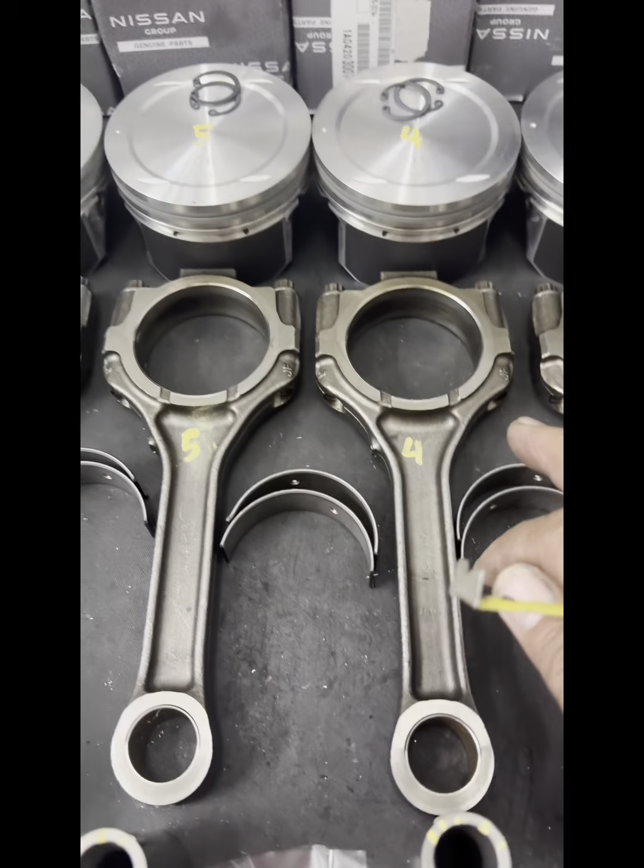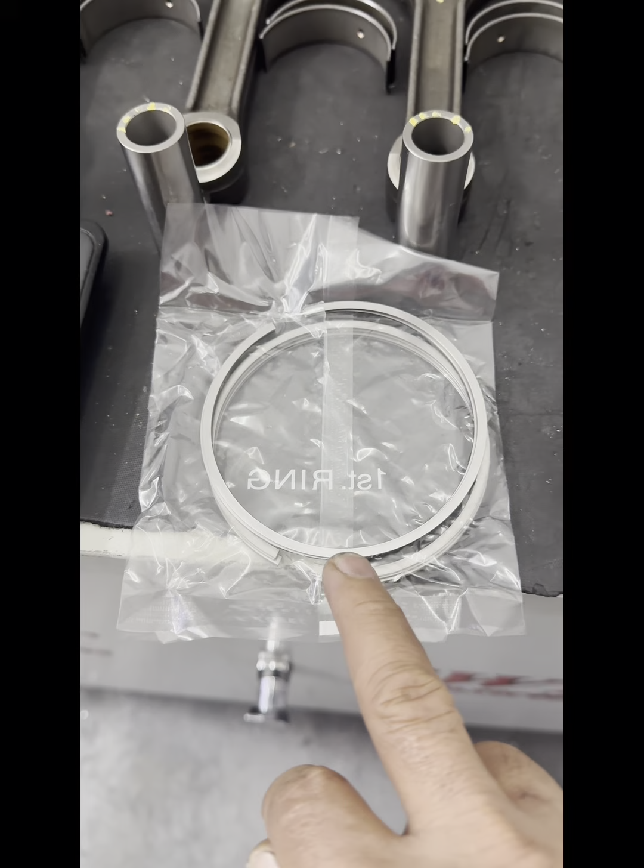And all the parts as usual. To balance a V-type engine, V6, V8, or even a 5-cylinder as well, we need to use bob weight. So to use bob weight, we have to calculate everything, the weights from the piston, the clips, everything. The rods, big end and small end, piston pin, and the bearing as well. And with the piston rings, we need only one set: the first ring, the second ring, and the oil ring.

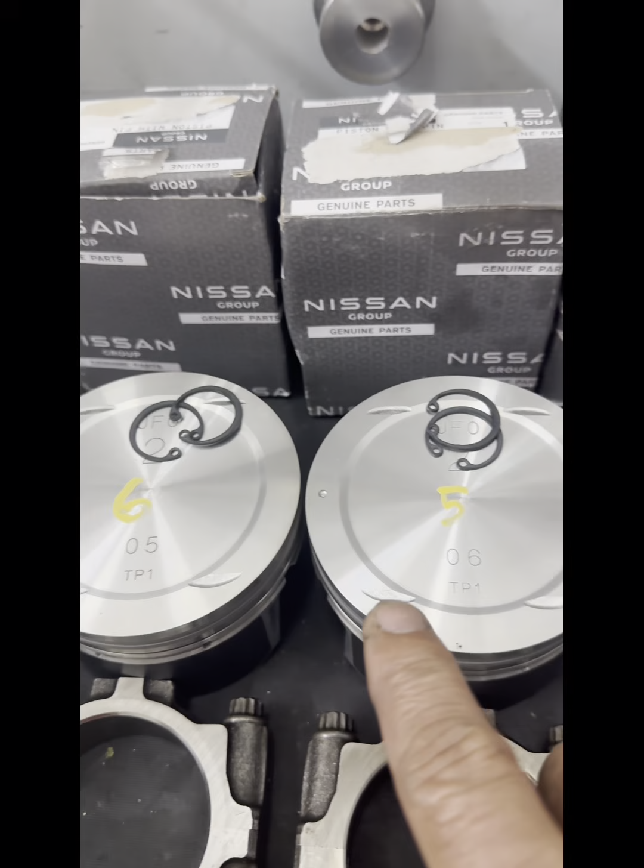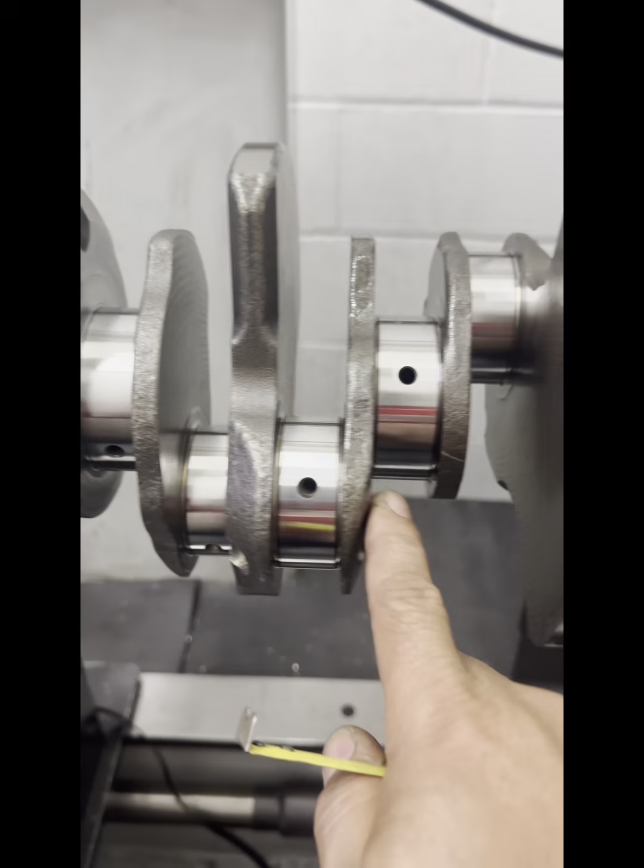So actually this crank is already ground 0.25, using ACL race bearings, 0.25 main and conrod. But for balancing, we need only the conrod bearing. Main bearing, we don't need. The piston is Nissan genuine, all original, along with the connecting rod, original, and the piston ring. So the crank is already ground, main and conrod 0.25, all nice already.

Alright, so now we're going to input all the data there. Okay, this one, B to B is the base. Here. 350. So 350, enter. And the radius. Radius is from the main up to the balancer, outermost from the center of the main. Okay, this radius is 93, left and right the same, 93.

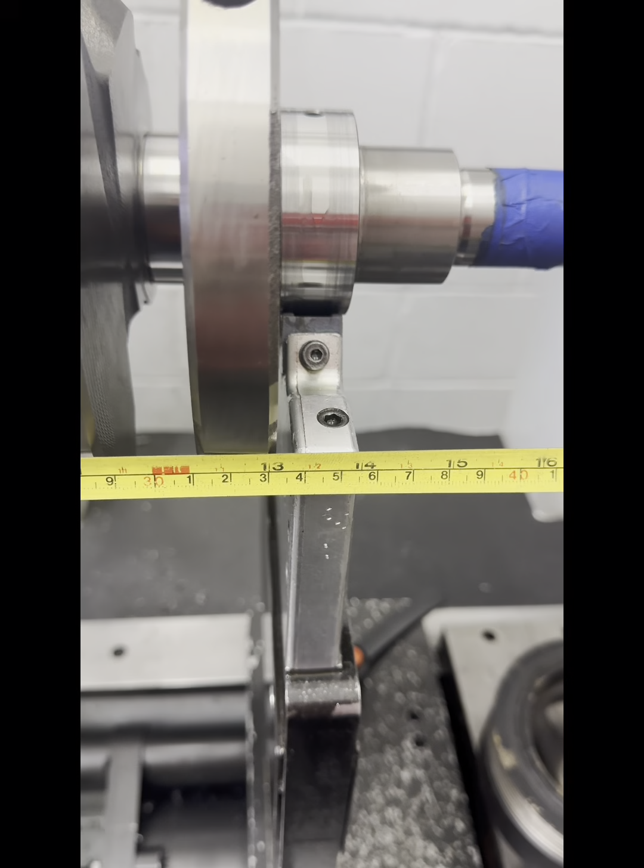Alright, the plane is this thing. The left plane is measured from the base to the center of the first balancer, 25. So 25, enter. And the right plane is from the base to the last balancer. Here. 325. So right plane, 325.

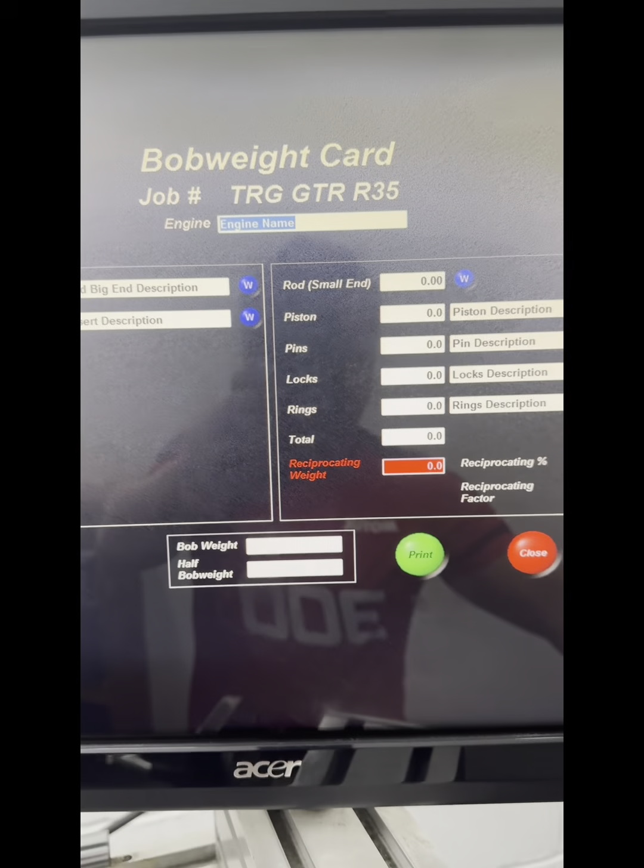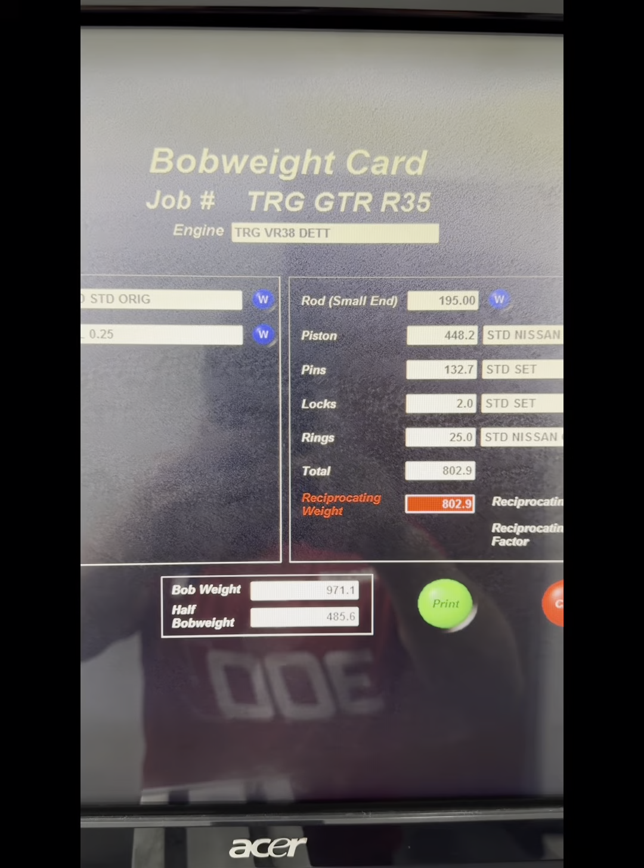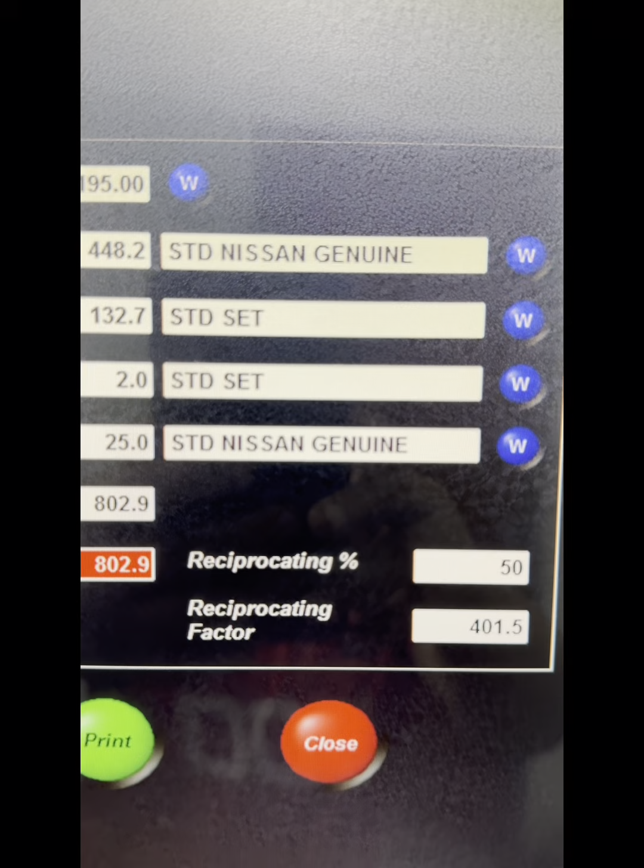Alright, now we're going to calculate the bob weight. All the data for the bob weight we will input here. This is the bob weight card for the calculation. So this is the description for the connecting rod, standard original. For the insert, the bearings are ACL 0.25, and the piston, pins and locks as well. The piston is standard Nissan genuine, the pin standard set, and the piston ring standard Nissan genuine.

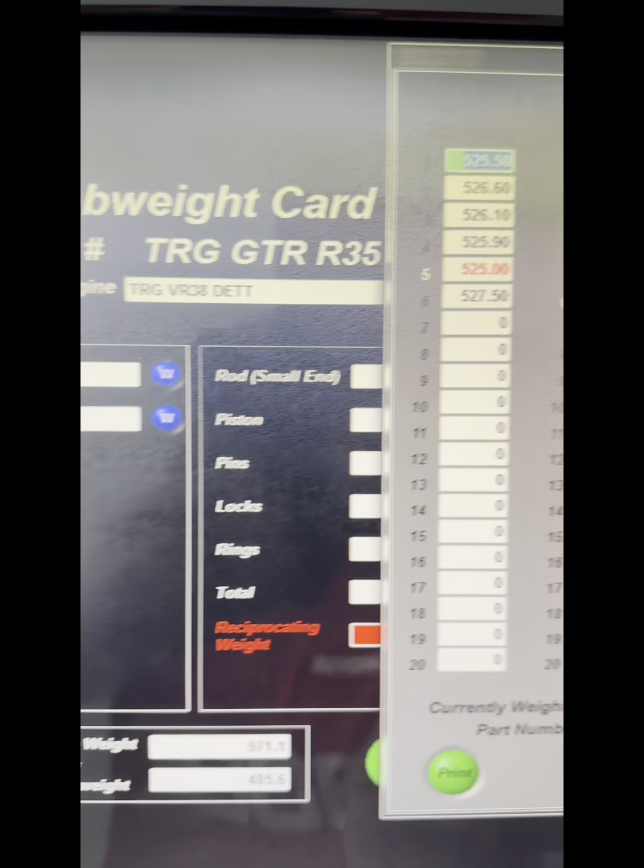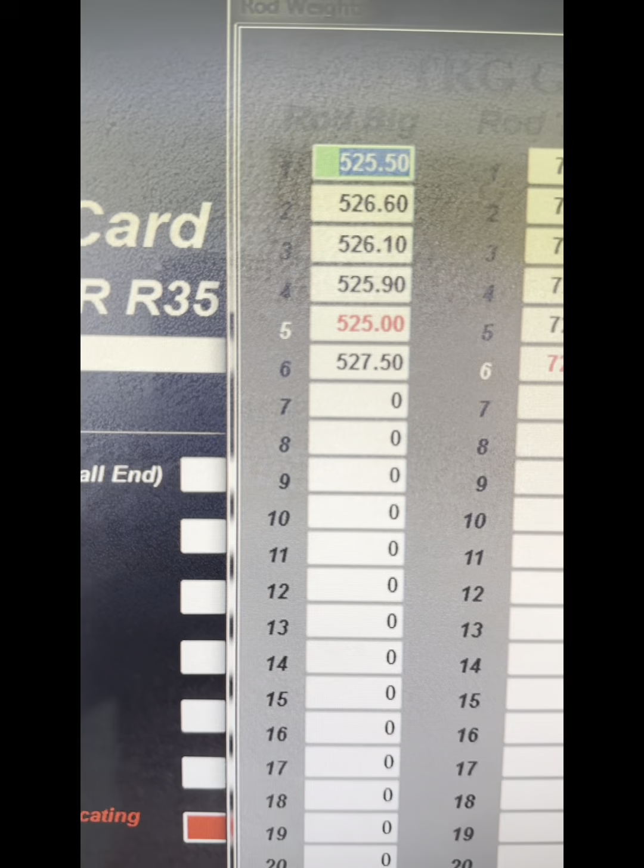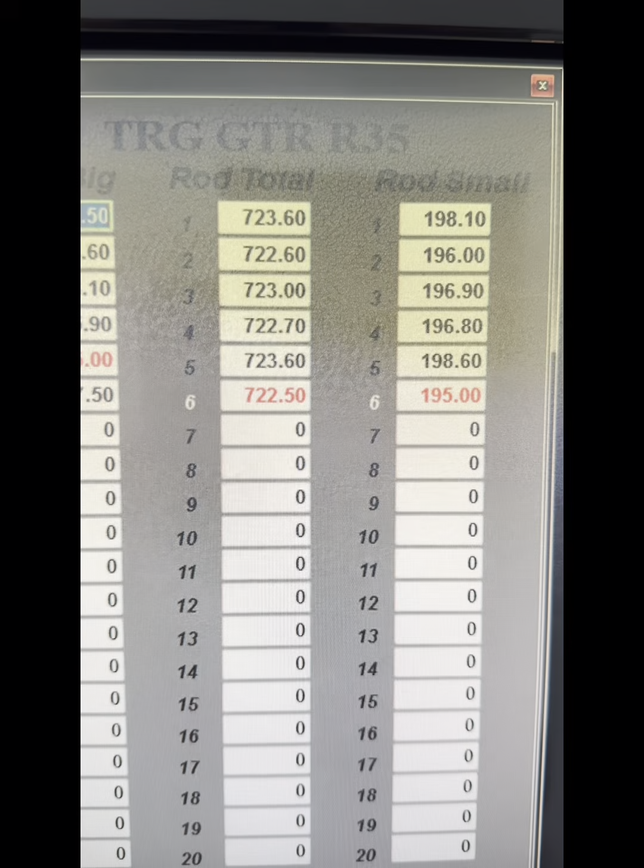So here I already input the connecting rod. This side is the rod big end, this one the total rod weight, and this one the rod small end bore weight. The important thing is the small end and the rod total, this is the reciprocating weight. The rod big end is the rotating weight. Here the heavier big end is number 6, but the total weight is lighter. So we have to focus on the small end weights. We follow the lighter one, the lighter total rod.

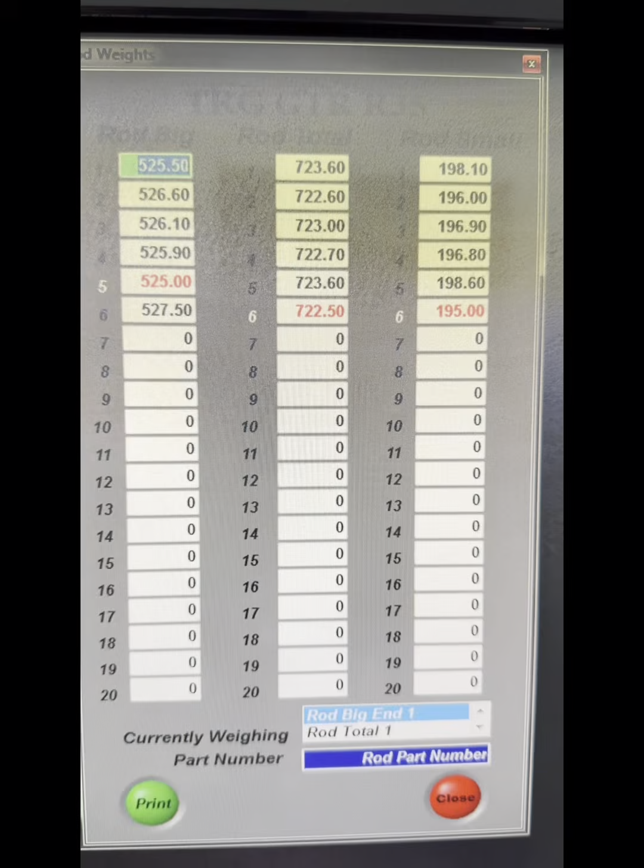Alright, now we do the removing of weight, balancing the connecting rods. Okay, we're ready to balance the rods. Most of the weight we take from the small end. This one also from the big end, but not from the small end, because we have to focus on the total weight of the rod. So here's the number we get.

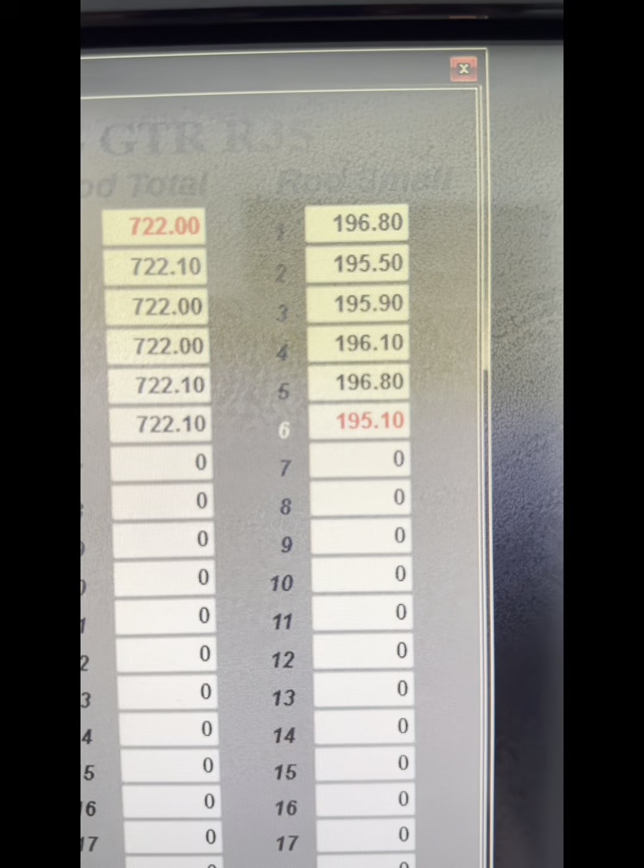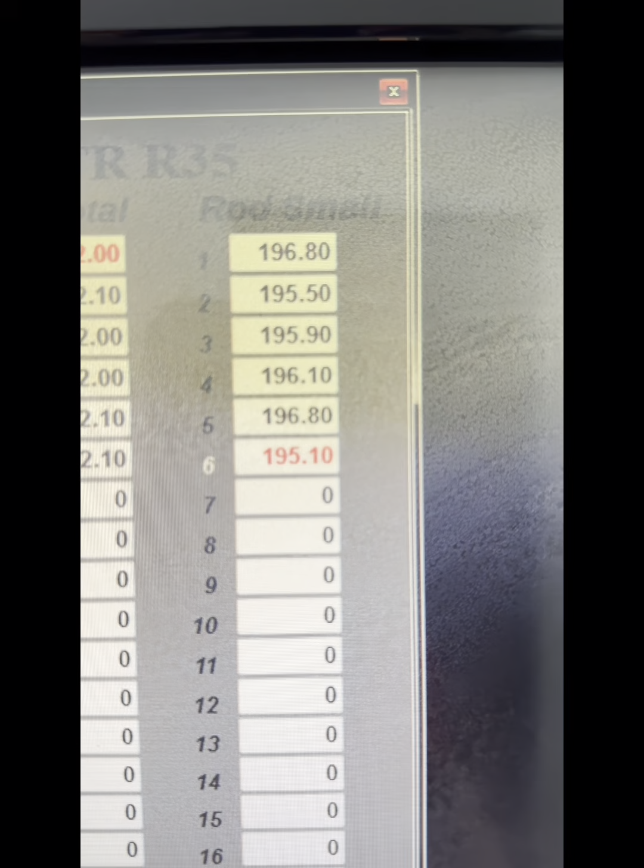So the rod total is within around 0.1 grams only. The small end is the closest we can get. It depends on the rod big end. The rod total minus the rod big end equals the rod small end. This is very important, these two, the rod total and the rod small end bore. Alright, done with the rods.

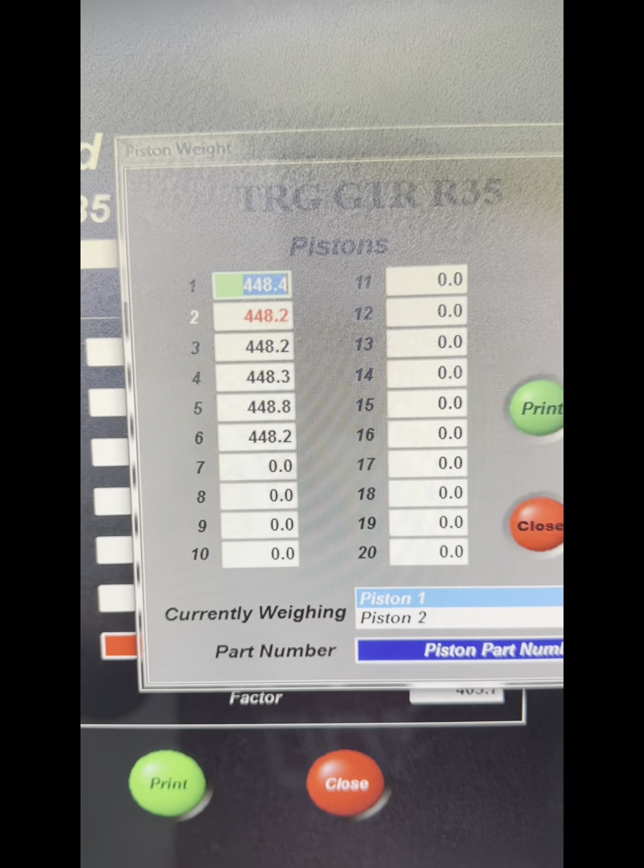Okay, for the pistons, number 1 is 448.4. Number 2 is the lightest one, 448.2, around 0.2 grams less. The heaviest one is number 5, 448.8. So we have to remove weight. We follow number 2.

So this one, the lightest one, so we follow this weight, number 2. Alright. The piston, I really removed some weight there, just a bit only. Follow the timbang 448.2. This one is 448.2.

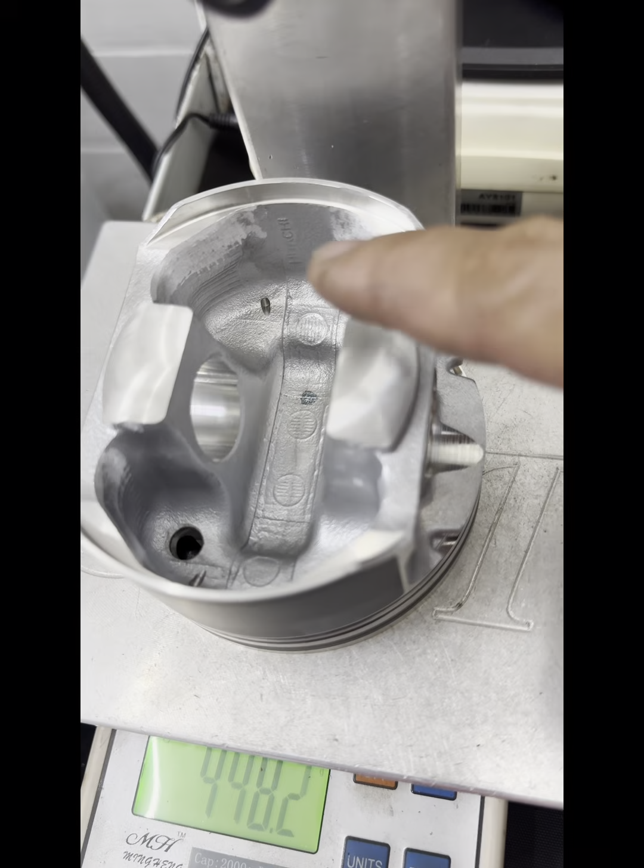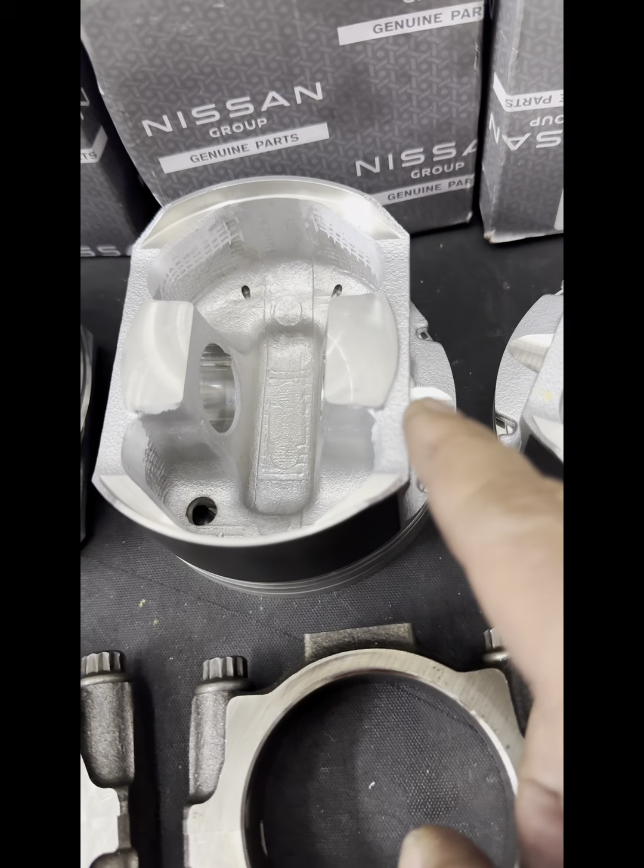But in removing weights of piston, you have to be very careful. It cannot be simply anywhere. This area we can remove weights, like here, this area. We cannot simply take, we have to see the strong point. Alright, these three only we remove weight because the rest are almost the same already.

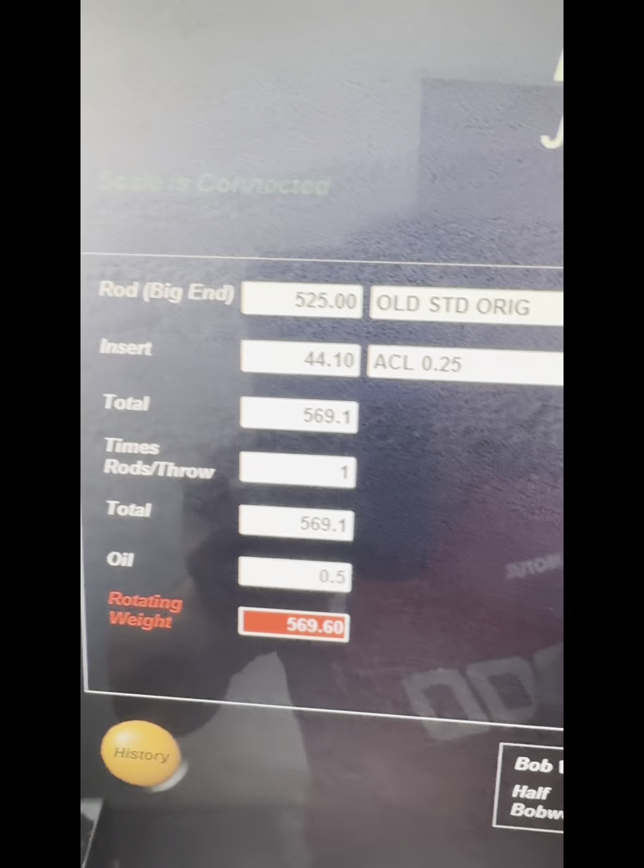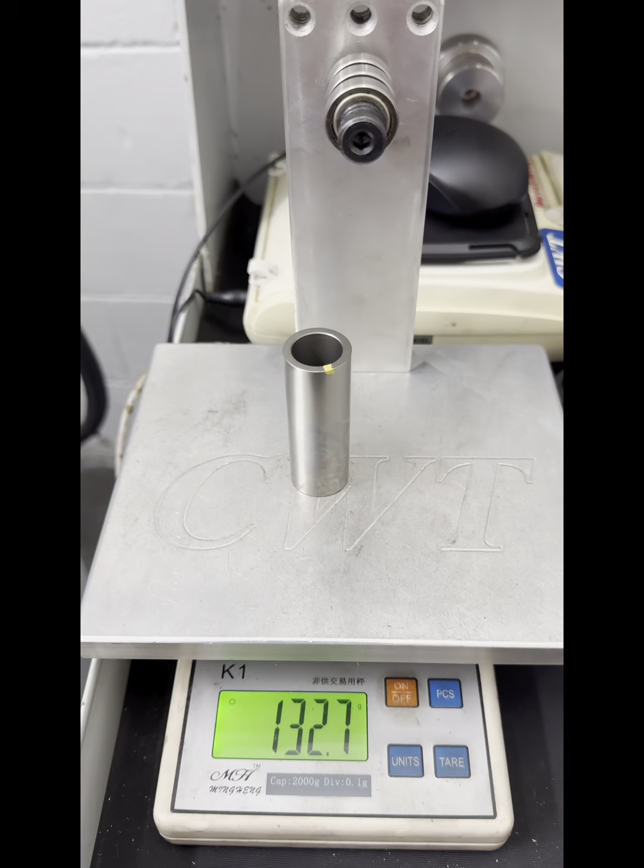Same weight already. The lock as well, 2 grams. Here the lock is 2 grams input. We'll weigh this insert or the bearings. So this one is 44.1, here 44.1. Insert in the piston ring. This one is 25.0. Here is 25.0, piston ring inputted already. Alright. Piston pin 132.7. Here, piston pins 132.7. Okay, we have all the data.

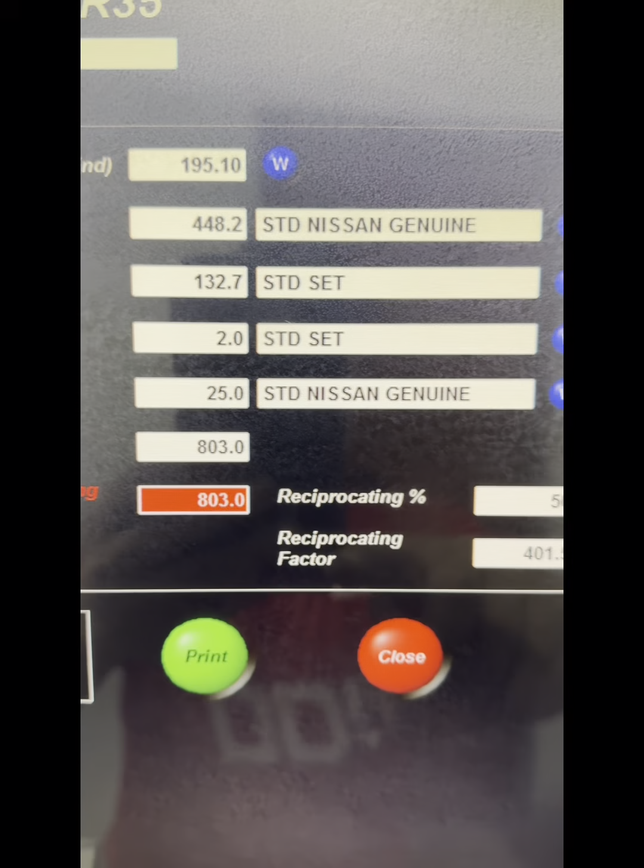So this is the reciprocating weight. This one the rotating weights. So the reciprocating weight is 50% to be calculated. So the total reciprocating weight is 803. So 50% is 401. 401 plus the rotating weight 569. So our bob weight is 971.2. So this is our bob weight, the weight of our bob weights.

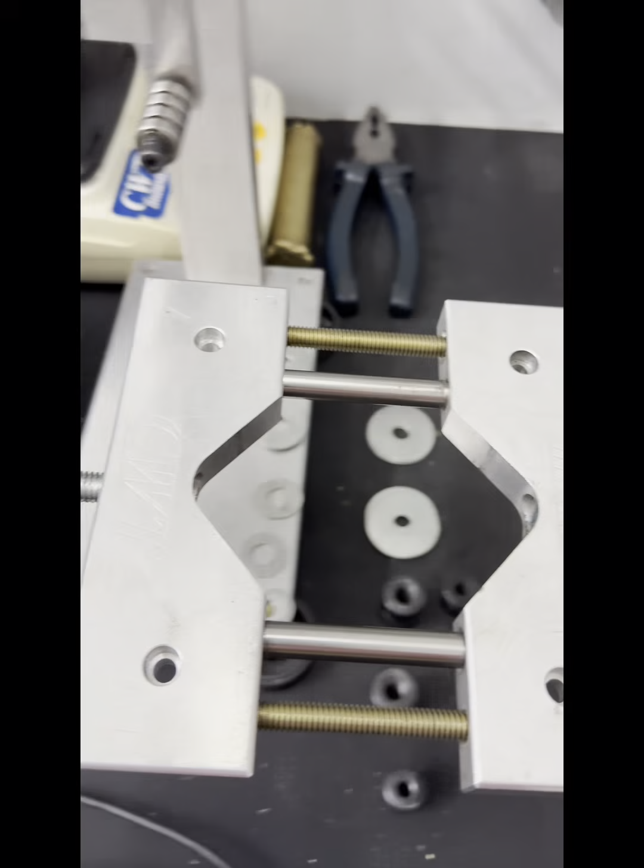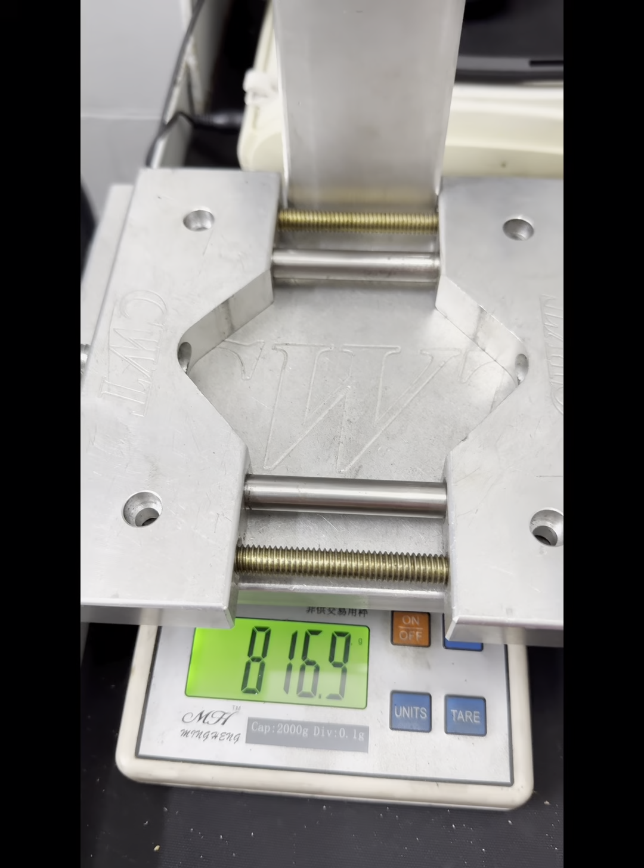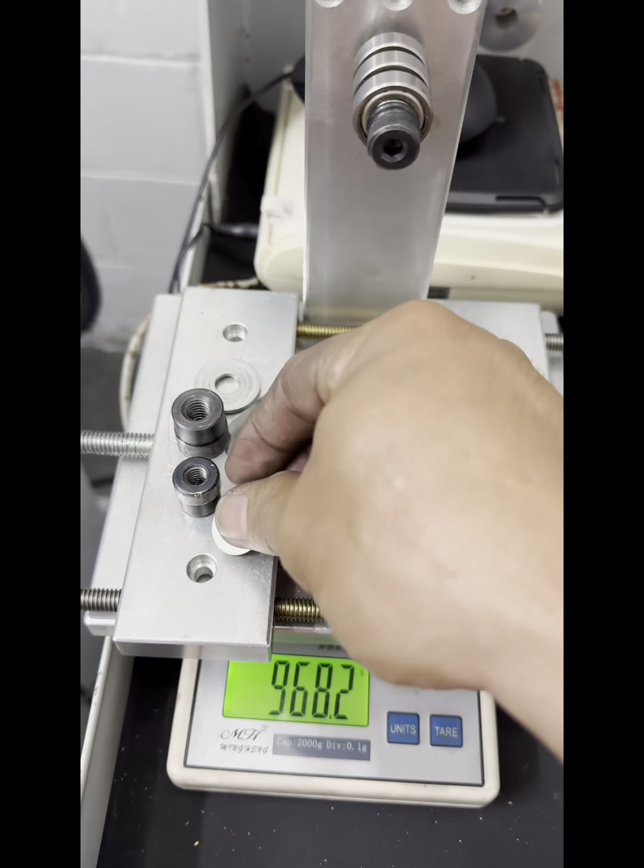So we pause. Alright, so we have to put everything all the same, left and right. So 971.2. So however many you put this side, same also this side. So we balance. So 971. This one 971.3. So 971.2, around 0.1. 0.1 cannot affect a lot, just 0.1 grams. Alright, so this is our bob weight, total weight of this one.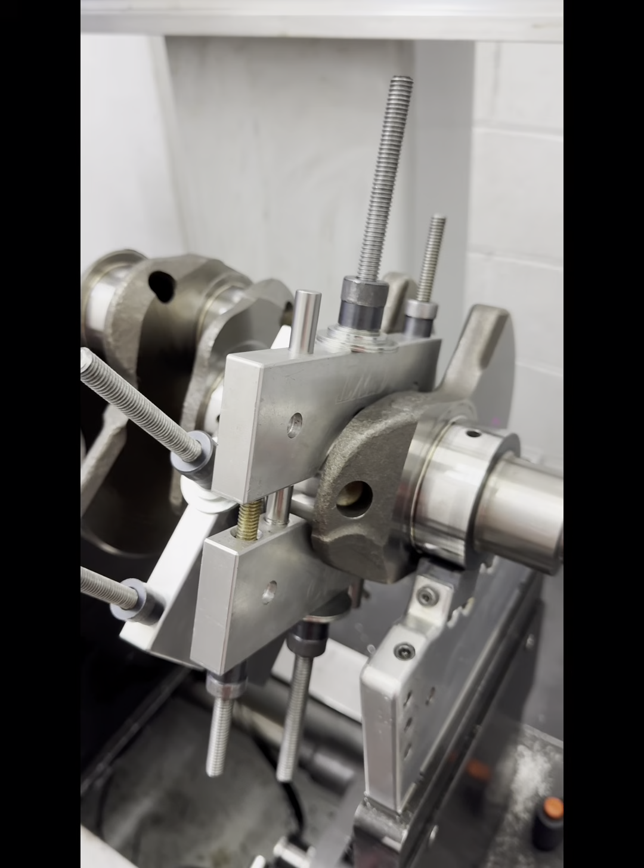So now we're going to install this one to the crankshaft. Alright, so now installing the bob weight. I installed already, another 4 more. Right, done installing all the bob weights. So 6 bob weights. So now we're going to balance this crankshaft first. This GTR R35 VR38 engine can be balanced with the crankshaft first, and then after that, we put the pulley and the flywheel.

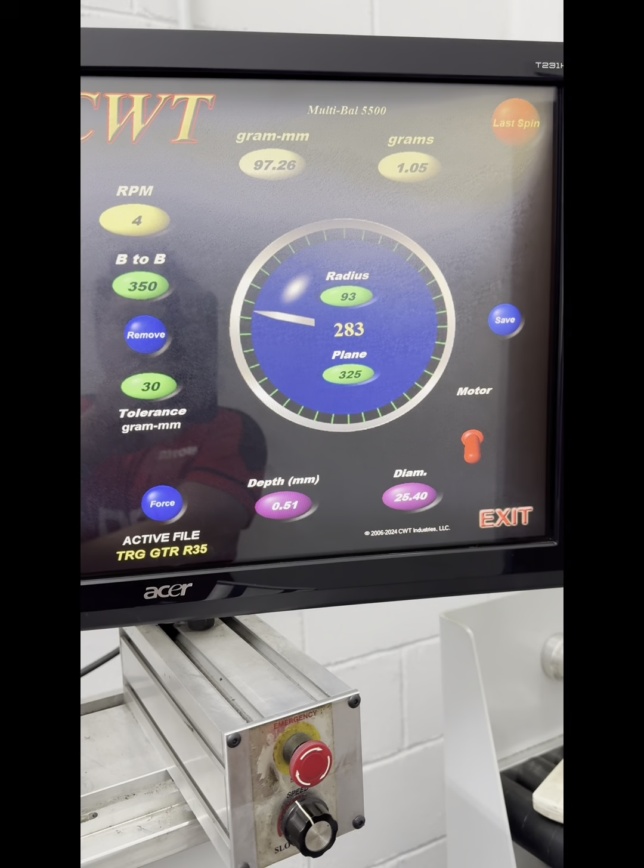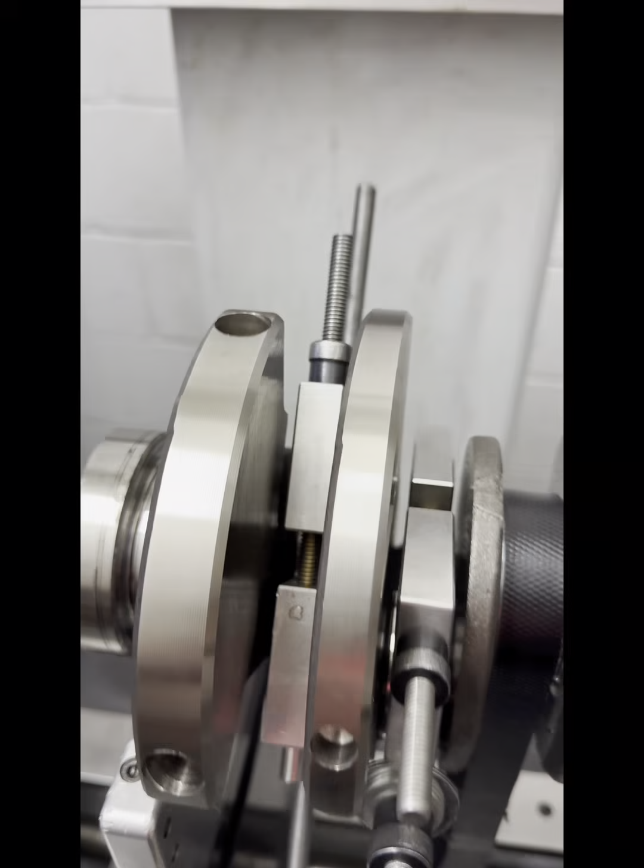Okay, so now we're going to spin the crankshaft first at 400 RPM. With the spin, we will know how big and where the unbalance is for this crank. This crank we ground because it bent a bit; we ground 0.25 main and front rod. Alright, the unbalance: left side or the flywheel side 2.73 grams, front side or the pulley side 1 gram. So here for the front side, this side. For the rear side or left side, this side.

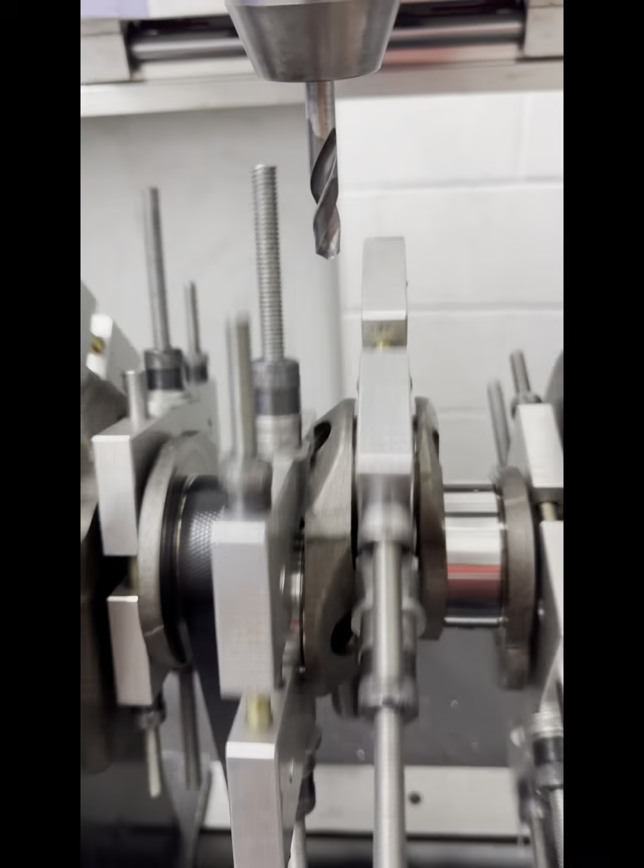Alright, now we do correction, remove some weights, we balance, and then we spin again. Okay, now we remove weights at this angle, around 2.73 grams. Since we cannot drill here, we drill here. 2.73 grams. Alright, we drilled this. So now we're going to spin and see how much is still to remove. Alright, spin.

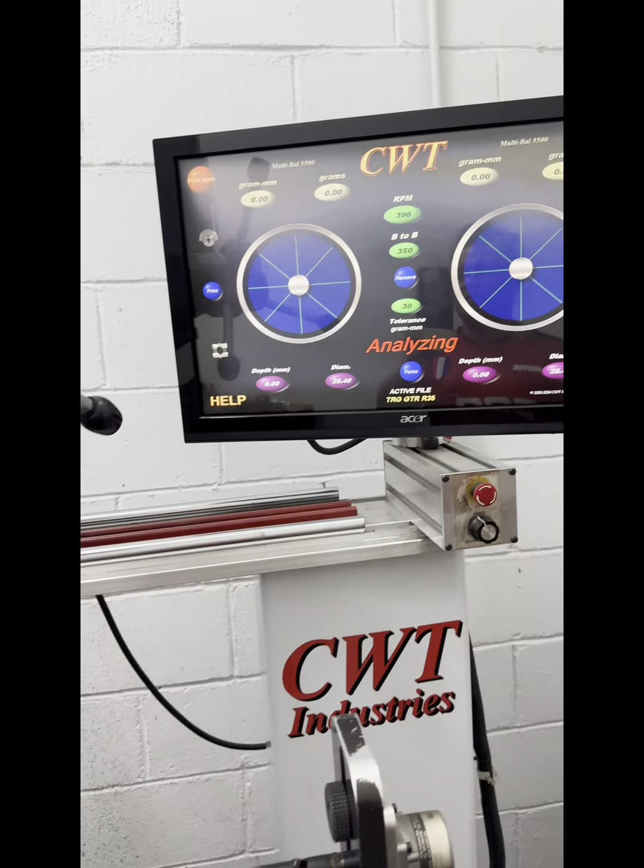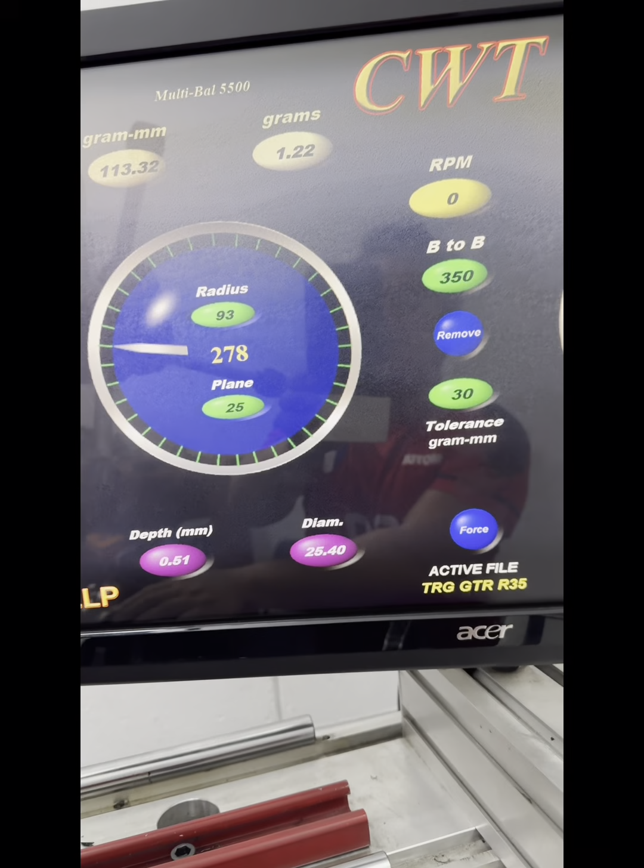Now spinning. Analyzing. Alright, here it is. From 2.73 grams now 1.22 grams. The front side we don't touch yet, so we do the left side first, the rear side. So 1.22 grams left, this side, same. Still not enough, so we need to drill some more on this side. Right, so I drill another one here. Hopefully this one is enough or not, so we have to check.

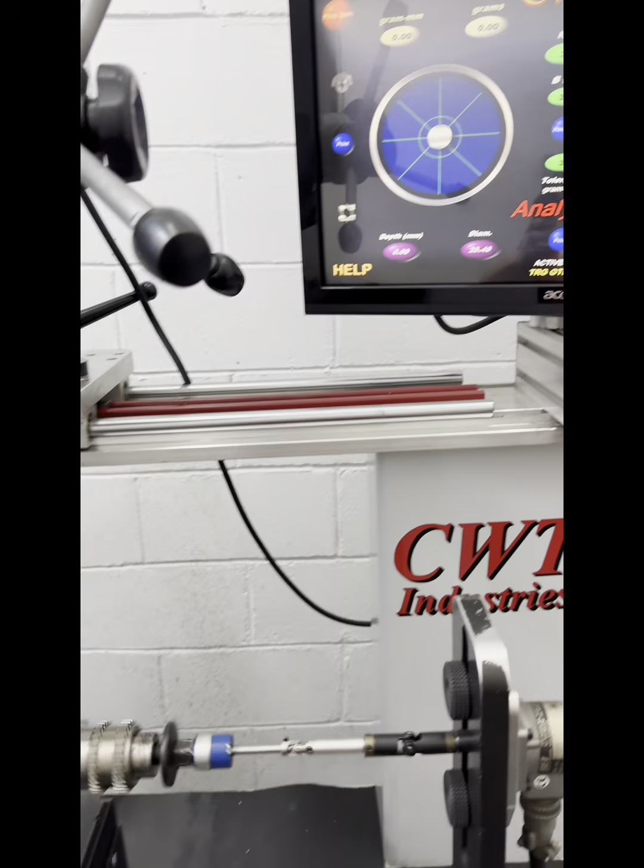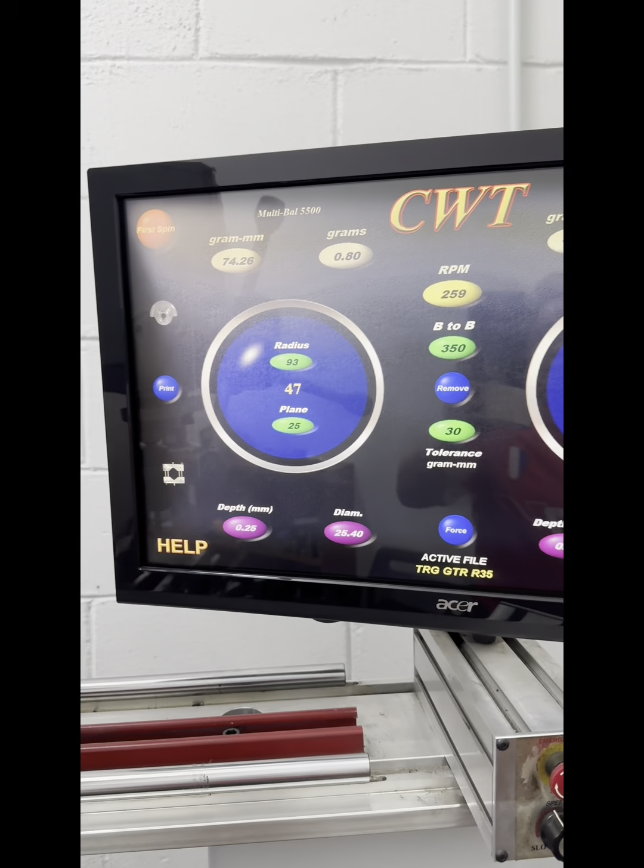Spin again. Alright, spinning. So hopefully the one we drilled is enough, around 1.22 grams for the left side. The front side we don't touch yet, a bit unbalanced there. Alright. From 1.2 grams, now 0.8 grams. But the front side went from 1 gram to 1.8 grams. It's normal that when we drill, the other side will be affected.

So which side? The front side? This one. This side, so we can remove weights here. The left side, which side? Same area here, somewhere. So still okay, but we have to do correction first on the front side. Here, we have to remove some weight on this front side. Okay, now we're going to remove 1.8 grams on the front side, right side. Alright, yeah.

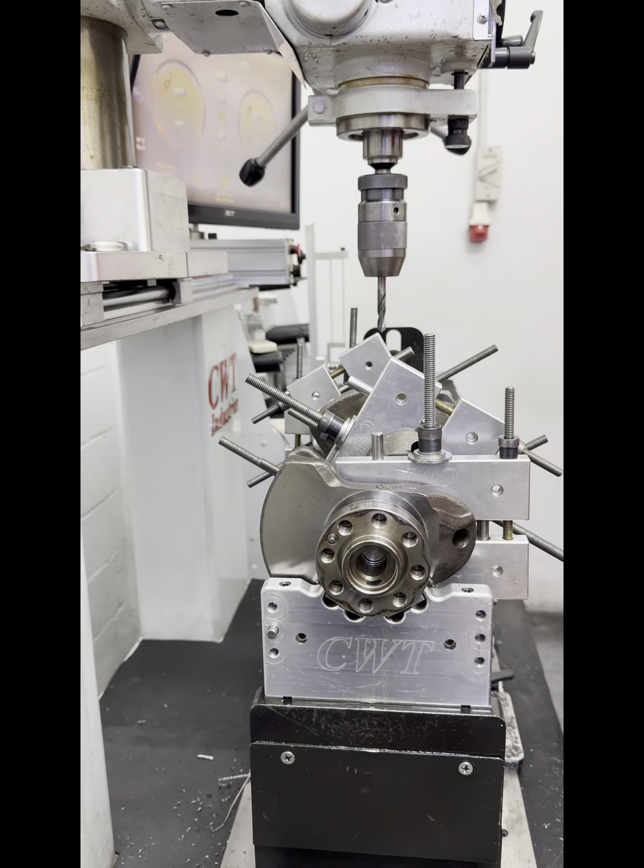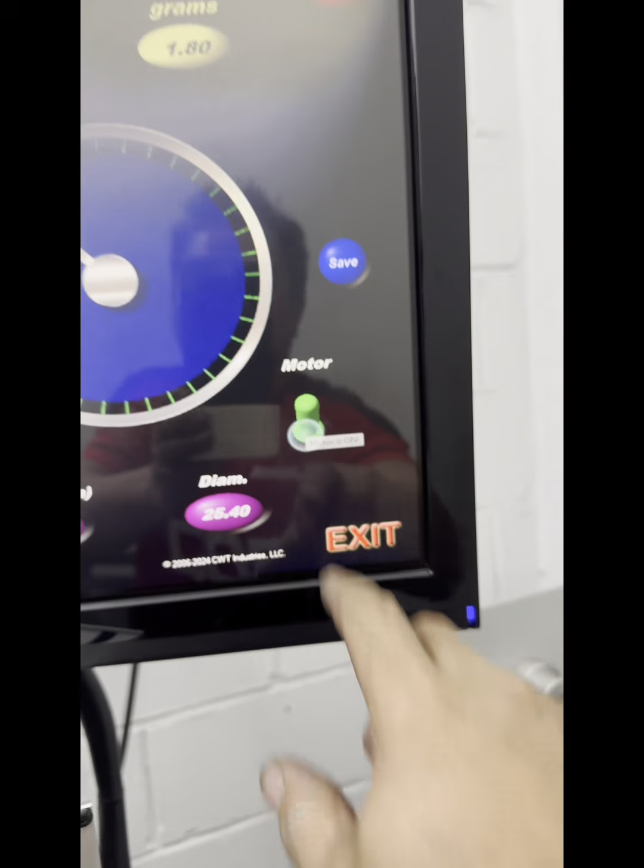Alright. Spin, check if this one enough or not. So this one, alright, have to spin, check if this one we drill enough or not. Alright, spin. Spinning. Analyzing.

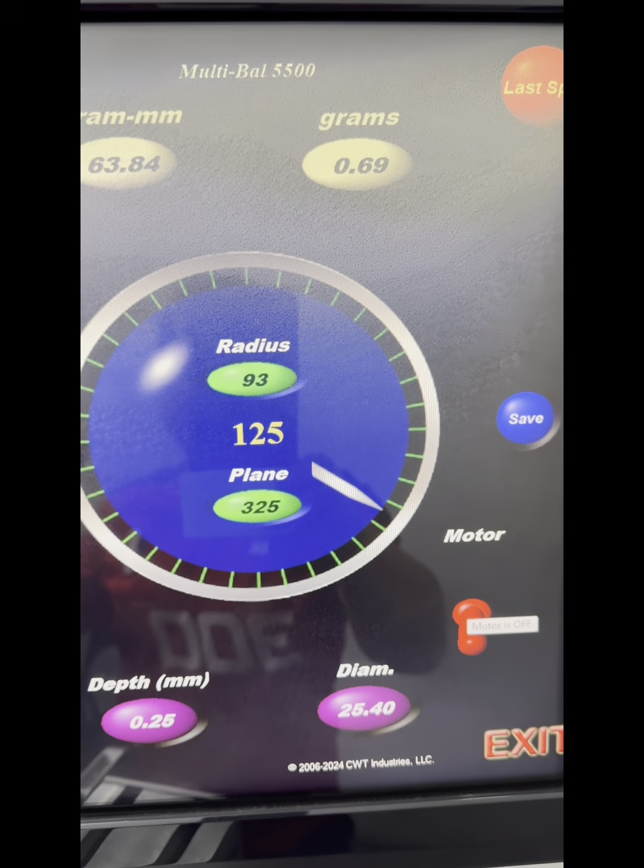Alright, from 1.8 grams become 0.69 grams. So which side? Same side, around few degrees from the one we do the correction, 20 degrees. Alright, the rear side is also same this area. Alright, so we have to do correction in the rear here and the front side also. Here we have to remove some.

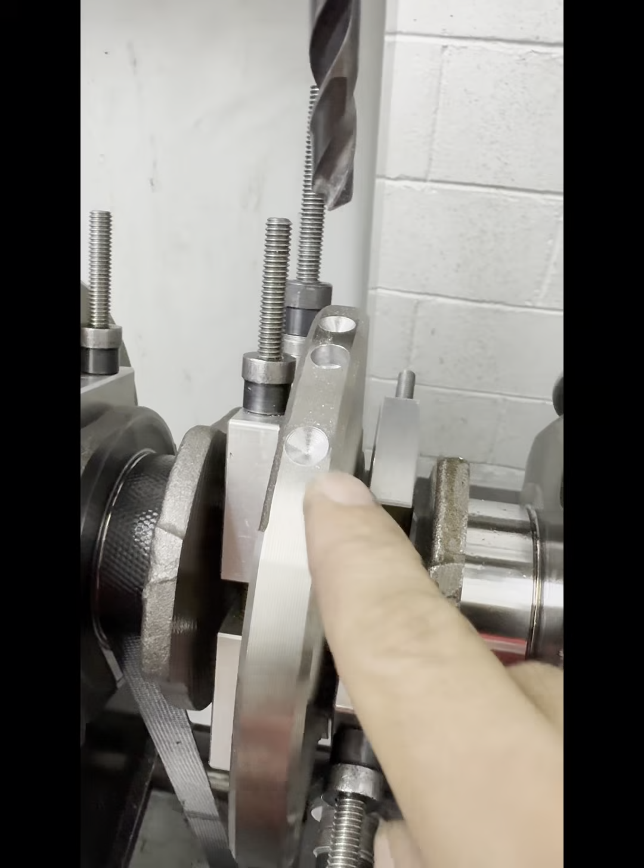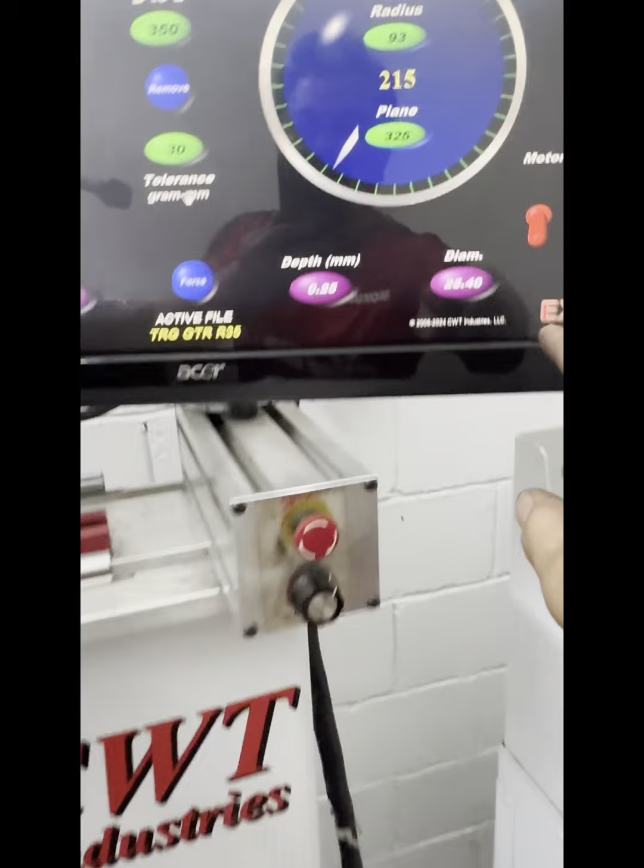Alright, okay, we already remove. We take out some with this side, same area here, few degrees. And the front also, we also remove some more here, some more deeper the hole drill. So hopefully this one enough balance to tolerance. Okay, now check, we spin. Alright, spinning, crank spinning, analyzing.

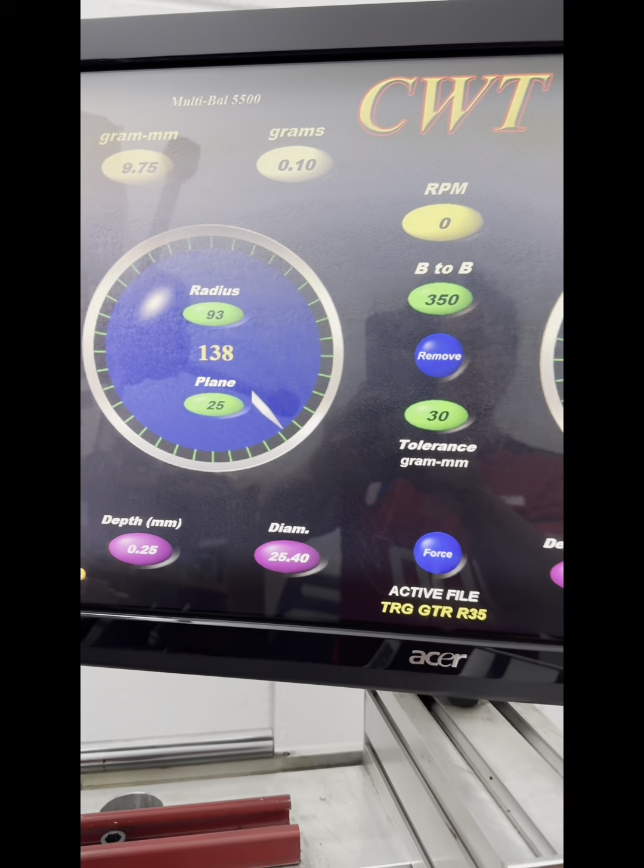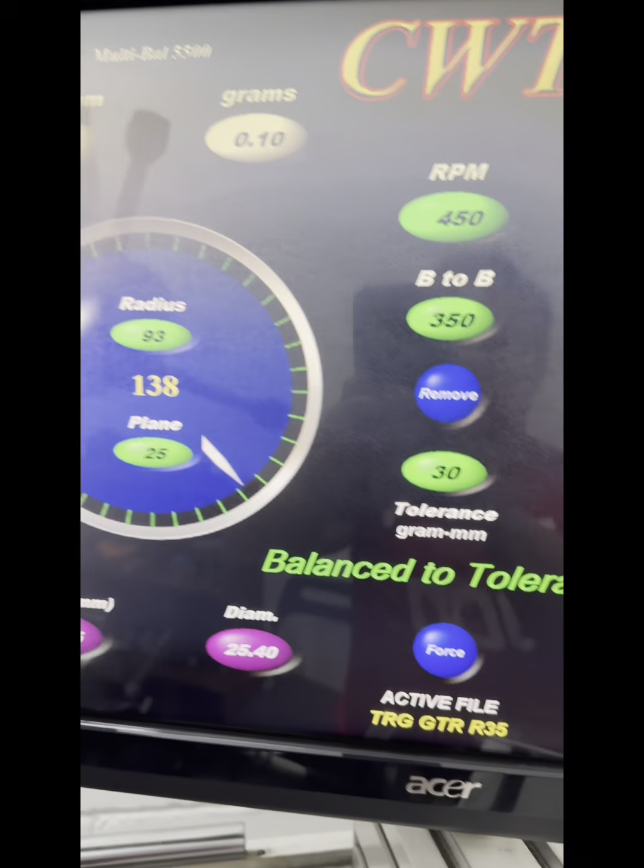Alright, so this crankshaft balance to tolerance, from 1 gram now 0.18 grams. This one from 2.75 grams now 0.1 grams. So our tolerance is 30 gram mm. So here is 9.75 gram mm, and 16.75 gram mm. So now this crankshaft with bob weight is balanced to tolerance.

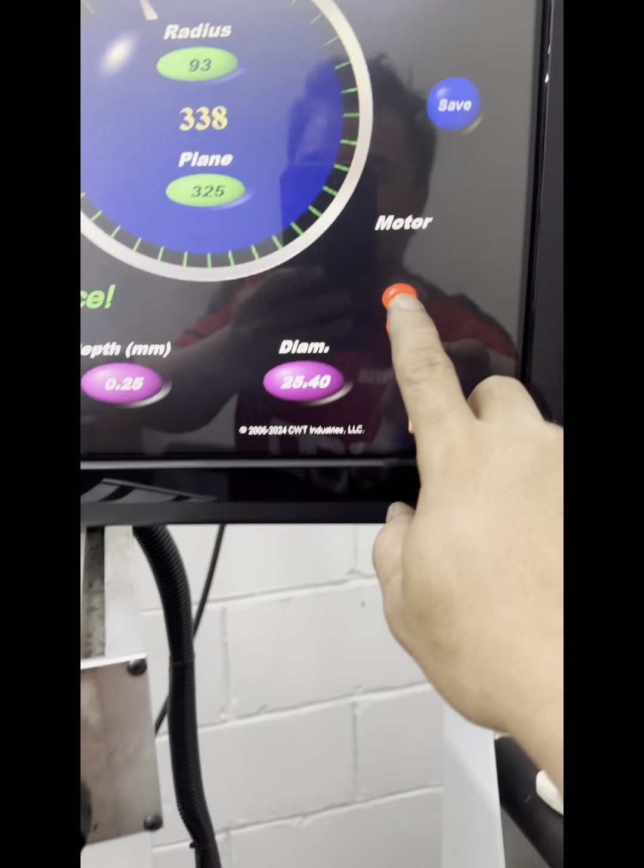Now we're going to put this pulley, and after the pulley, the flywheel as well. Alright, the pulley already installed. So we spin, check how big the unbalance for the pulley. We don't touch the crankshaft anymore because this crankshaft is already balanced to tolerance. So drill here, remove this one, the heavy side, and this side here. So now we're going to check this pulley. Spinning with the pulley. Analyzing.

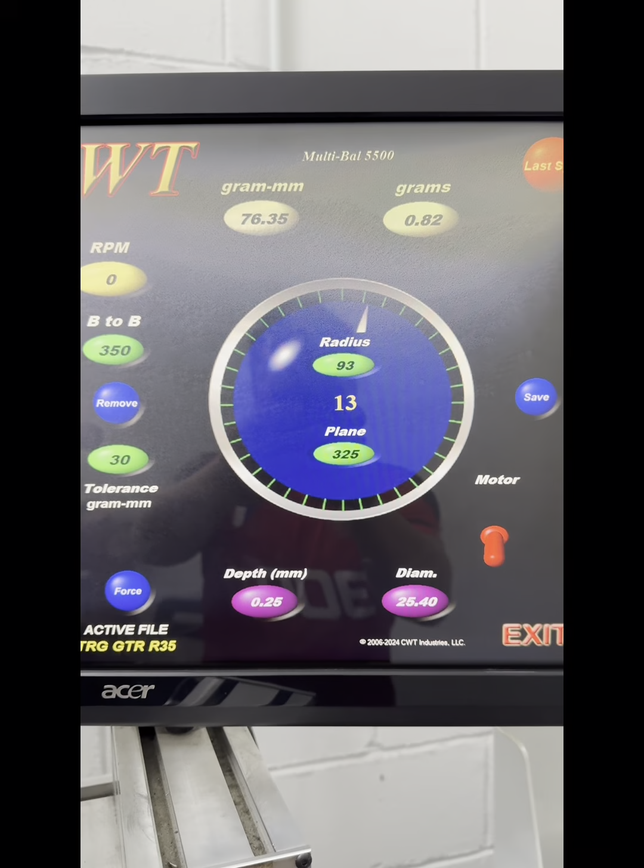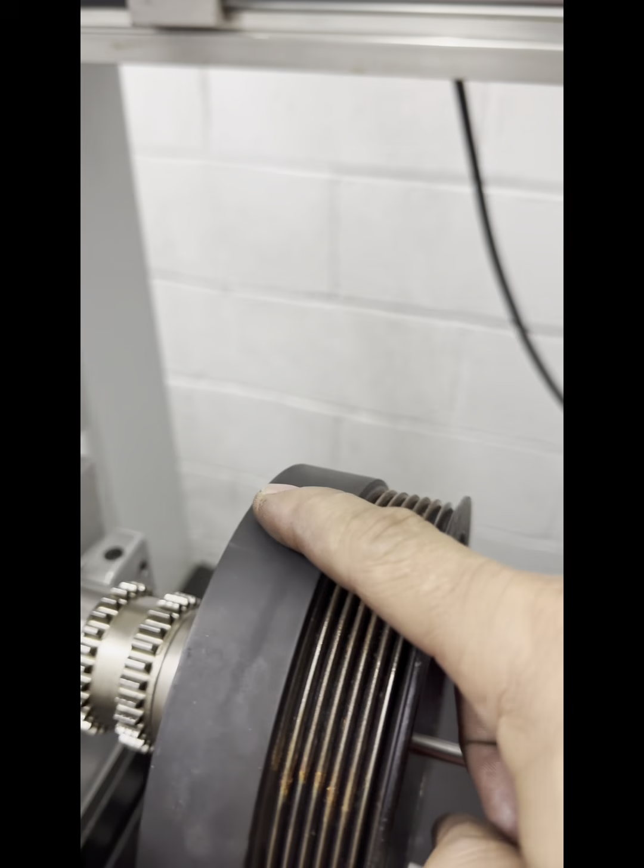Alright, wow, this pulley is very little unbalanced, only 0.82 grams or 76.35 gram mm. So which side? Alright, this side. So we have to put marking on that side. We do correction on this one side. This side is heavy, so we drill here, we remove weight here. Okay, so now we drill, remove some weight here, around 0.93 grams. This side is heavy, for the pulley.

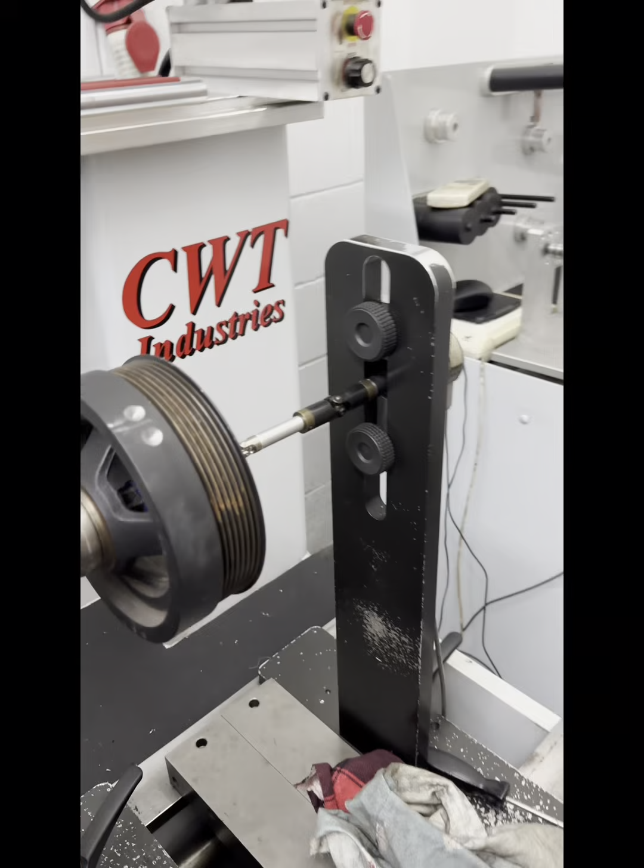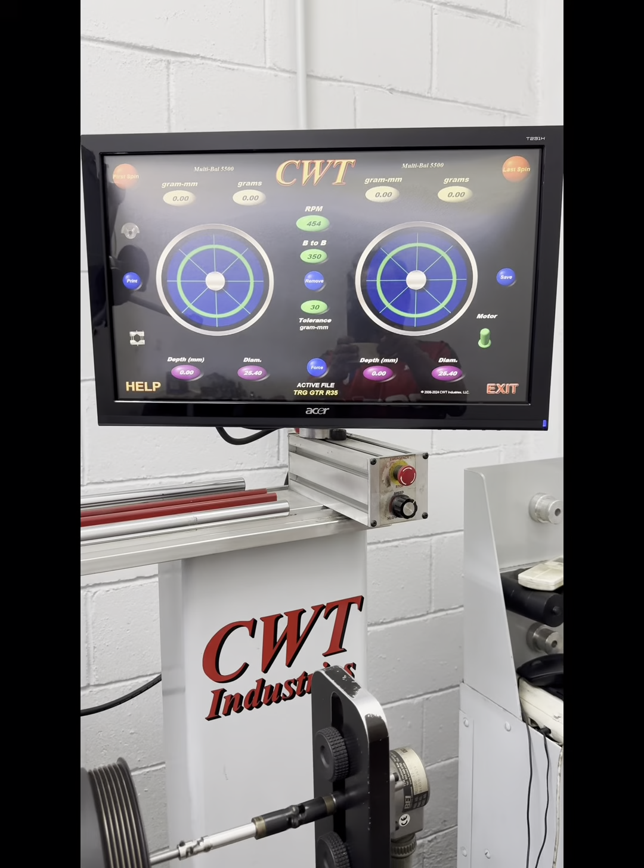We drill 2 holes, not so deep holes because this one is very thin. So this one is 0.93 grams. We check if this one is enough for the pulley. Spin. Alright, spinning. Analyzing. So only the 2 holes we drill, 0.93 grams, enough? If not, have to drill some more.

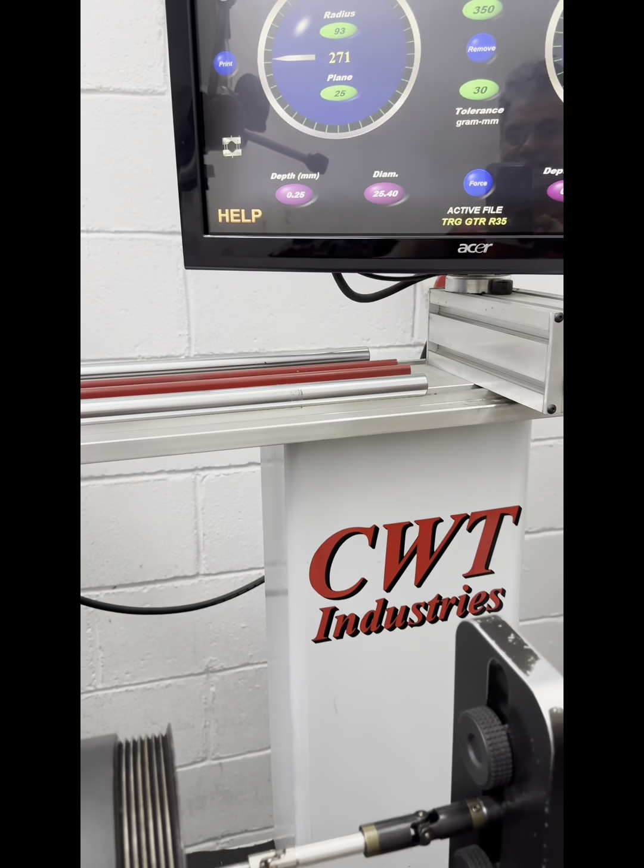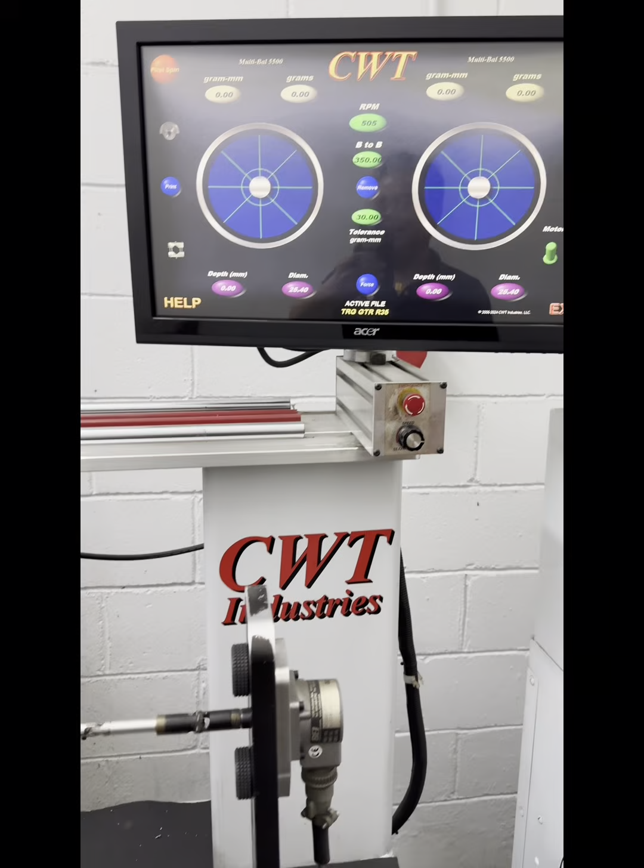Alright, still not enough. Still got 0.6, little bit only. Okay, have to drill some more. Which side? Okay, just now it's not enough, so I drill a bit more. So hopefully this one is enough already. Okay, now we spin and check. Alright, spinning. Analyzing. So after this, the pulley is enough, so the pulley and crankshaft are balanced already.

And then we're going to install the flywheel. Okay, this pulley is also balanced to tolerance. So crankshaft and pulley balanced to tolerance. So now we're going to install this flywheel, and we don't touch the crankshaft and the pulley anymore. Okay, with the flywheel already installed, now we're going to spin this thing, see how big the unbalance for the flywheel. The crankshaft and the pulley are already balanced to tolerance, so now we check the flywheel.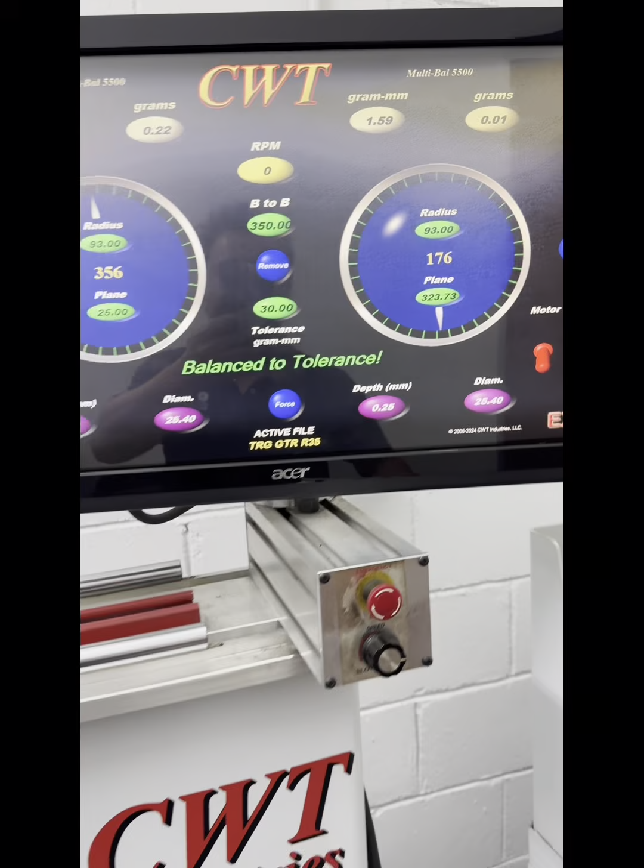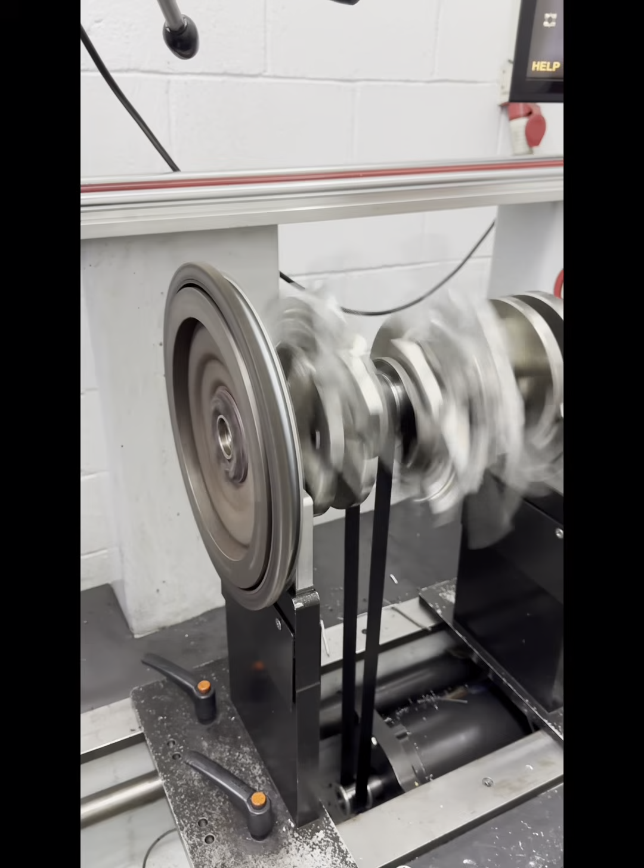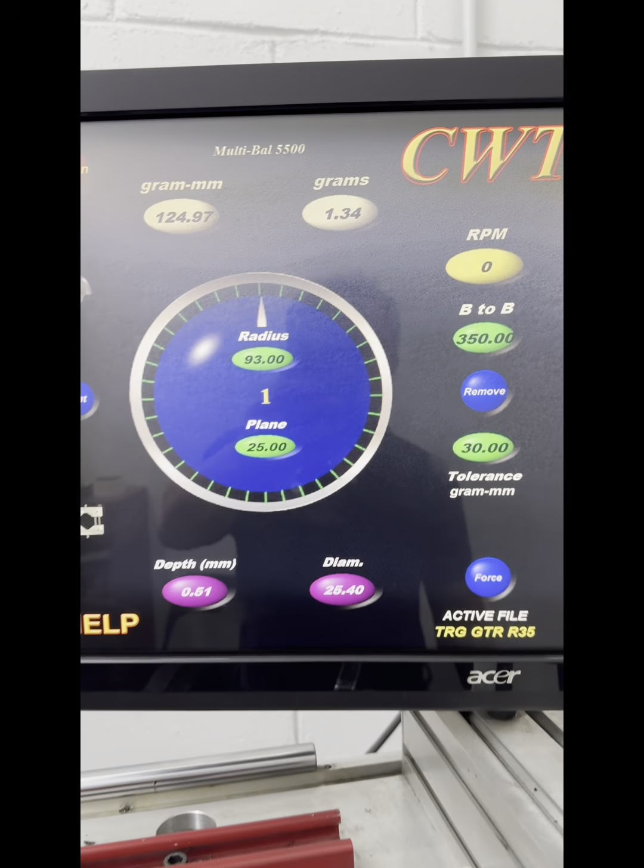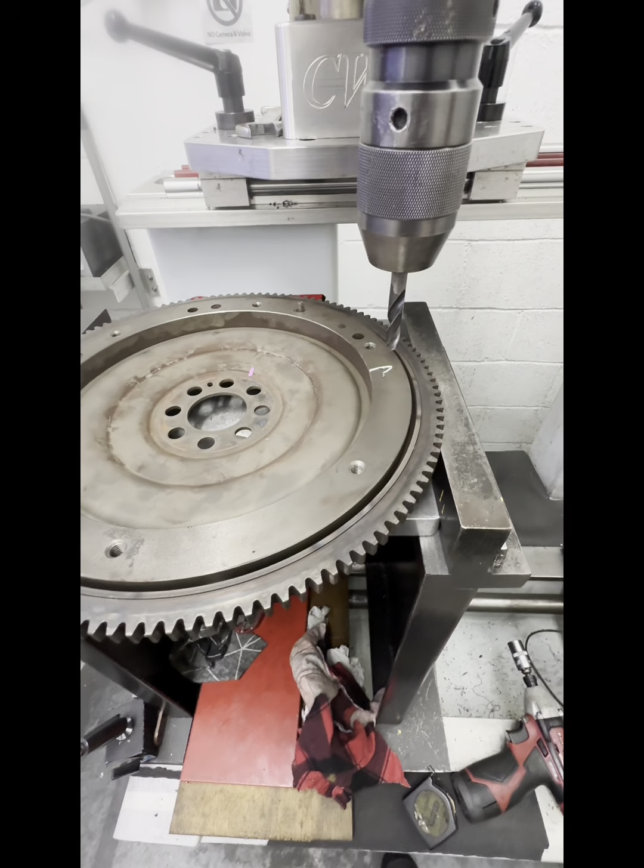Alright. Spinning. Analyzing. Alright, the flywheel unbalance is 1.34 grams. So which side? This side. Alright, we remove this flywheel and then we take out some weight here, this one is the heavy side. So here is the marking, we have to take out 1.27 grams here.

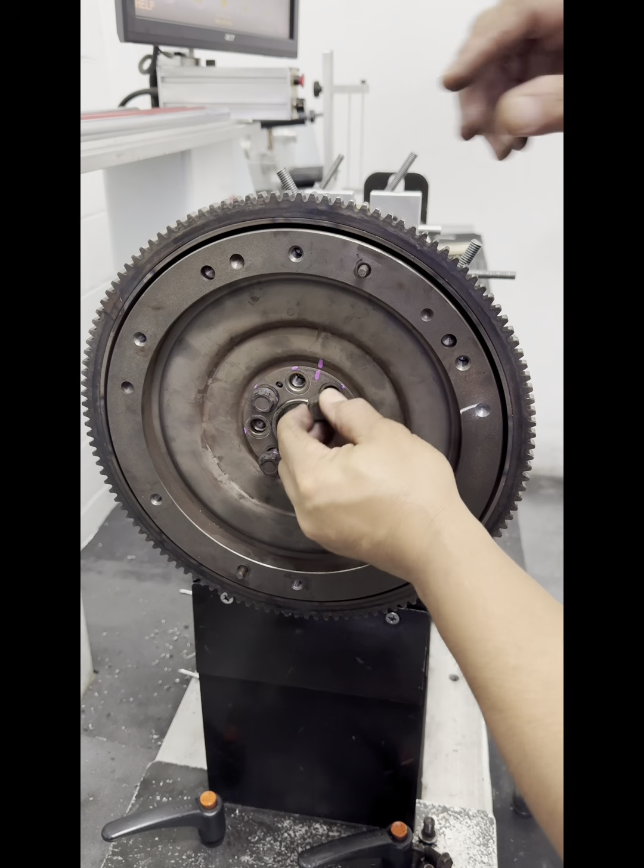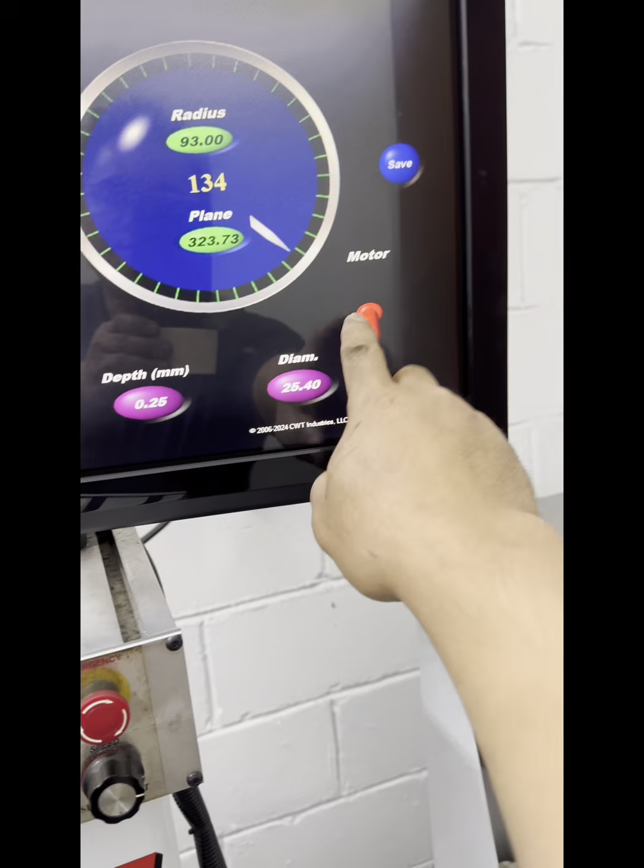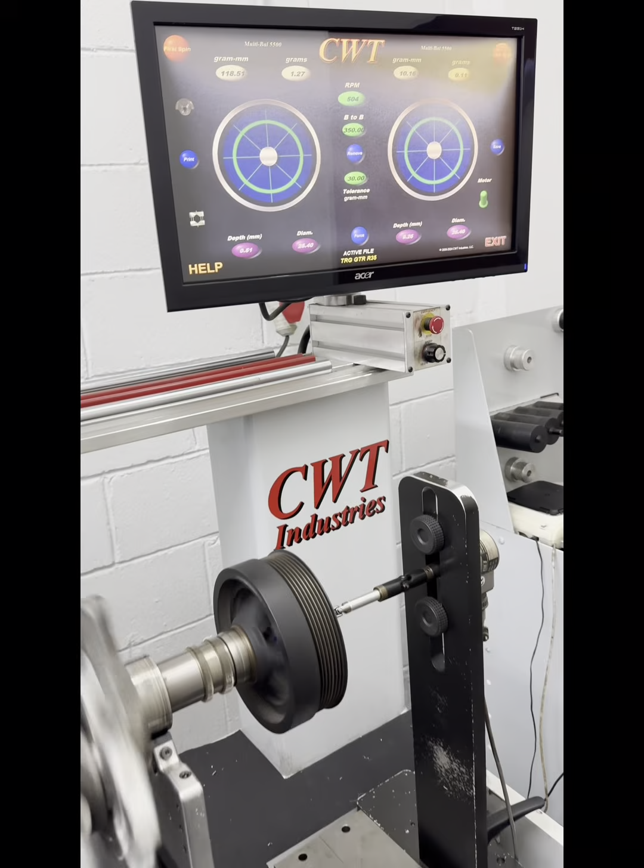Okay, enough for this one, hopefully enough for 1.27 grams. We install and we check the flywheel. Okay, now we install the flywheel. Hopefully the 1.27 grams we drilled is enough to make the flywheel balanced to tolerance. Done. So now we're going to spin. Now spinning. Analyzing.

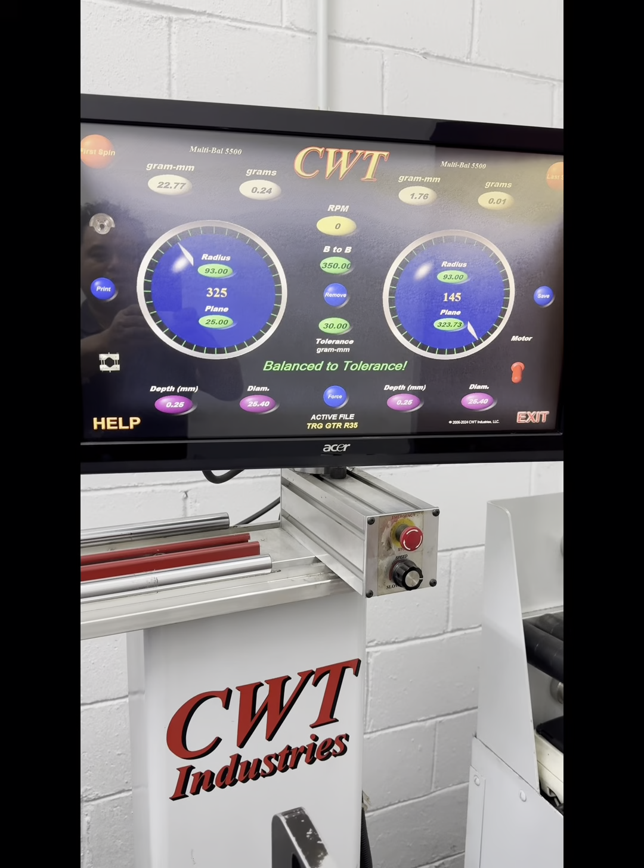Alright, balanced to tolerance. On the front side, balanced. Rear side, the flywheel, balanced. So this flywheel, crank, and pulley for the Nissan GTR R35 VR38 engine is balanced to tolerance. But to check the consistency, we have to spin one more time, make sure this one is really balanced to tolerance. This crankshaft, full balancing. Alright, spin one more time.

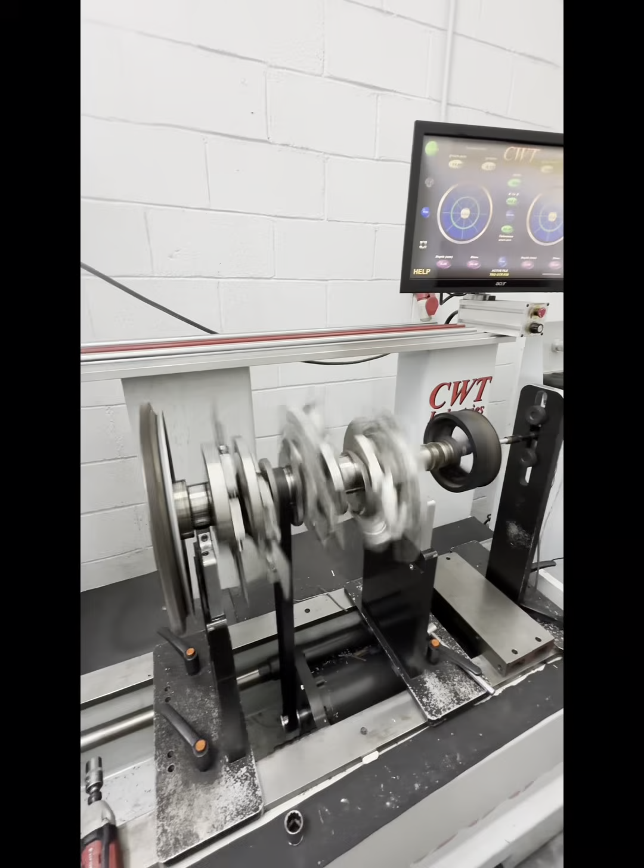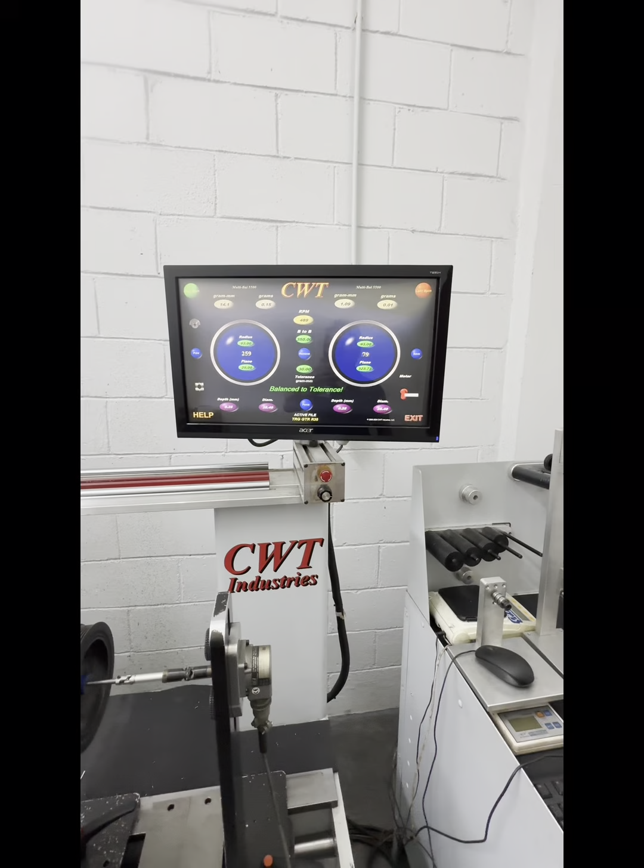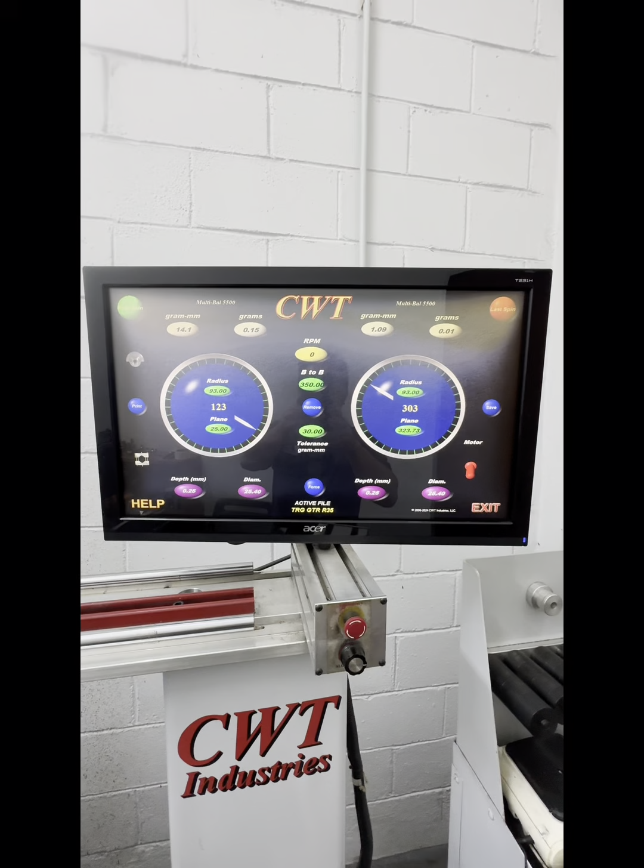Okay, spinning. Analyzing. Alright, really balanced to tolerance. So the flywheel side is from 2.75 grams, now 0.15 grams. This one is from 1.1 grams, now it's 0.01 grams. Very little amount. Alright, so this completes full balancing with bob weight for the Nissan GTR R35, balanced to tolerance.